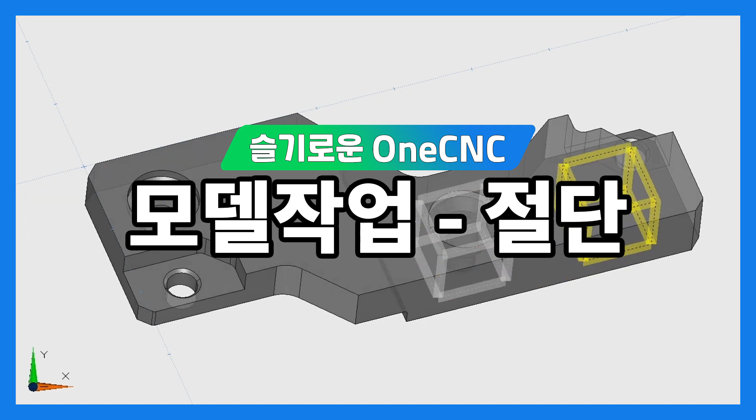In this tip of the day, I'd like to demonstrate a very powerful CAD tool provided by OneCNC, called the Solid Cutter. Solid Cutter provides the ability for you to use a solid model as a cutting tool. You can cut features into another solid model very easily.

Let me demonstrate. In this example, you can see we have a part represented by the gray solid model here, and then we also have another solid model that I'm going to use as the cutter.

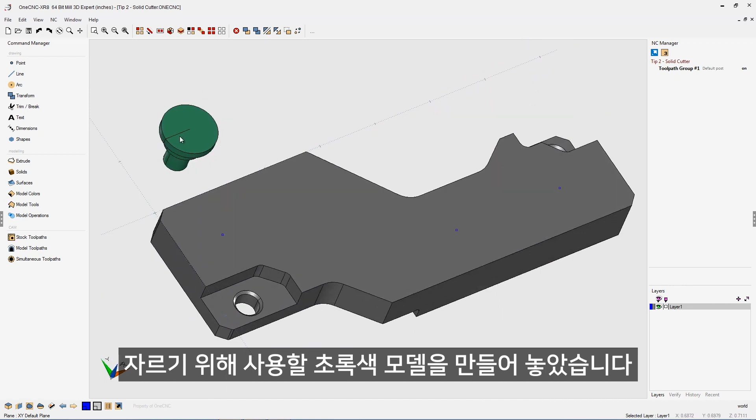Now the first thing you need to do is position the cutter where you want it. So I'm going to hit the letter S on the keyboard, left-hand mouse click the cutter, and go into our move tool. I'm going to grab the cutter right by the center line there, left click, digitize that location point, left click, and then right-hand mouse click.

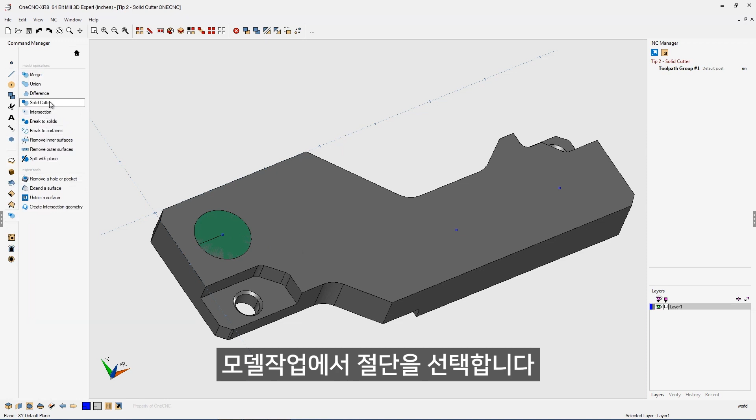Now with both solid models deselected, I'm going to head back over to the command manager. Let's go into our model operations and select solid cutter. Now down here, OneCNC prompts us, select the object you want modified. So I'll hover over the part and left-hand mouse click. Now it says select the cutter, so I'll hover over the solid model I want to use as the cutter, and left-hand mouse click. Now even though it doesn't look like anything's happened, OneCNC has actually cut a shape into the gray solid.

Let's move our solid cutter. I'm going to select the solid, hit the letter S on the keyboard, left click, go to move, grab the cutter by the center line, and position it at the second location point. That looks very good. You can see that OneCNC has used this green solid model as a cutter, and it's quickly created a very nice shape into our part.

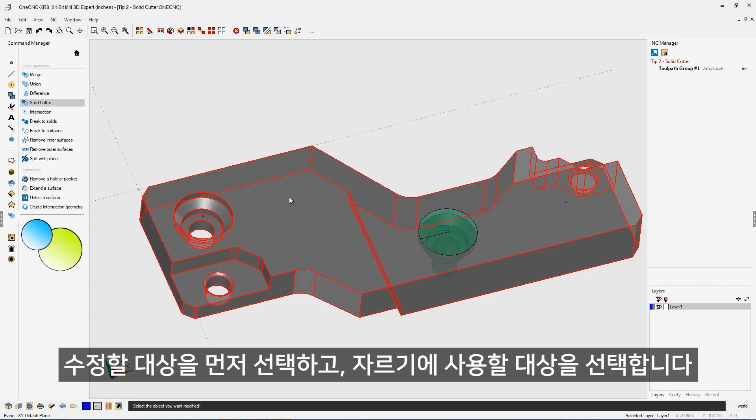Let's do the same thing again. Head back over to the command manager, go back into our model operations, solid cutter. Again, we select the solid we want modified first, and then we left click the cutter. Very, very easy. All right, let's do it one more time.

I'm going to left click the cutter, go into move, grab the cutter by the center line, and place it at the location. That looks great. Make sure that both your solids are deselected. Come back over to the command manager, go into our model operations, solid cutter, then left click the solid model, then left click the solid cutter, and there we go.

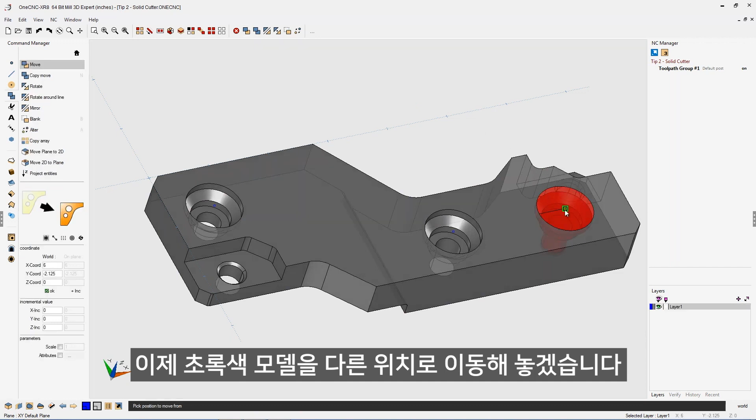Let's quickly move the solid cutter to a different location. I'm going to grab it by the center line, and just place it right about there. That looks good. Now another very powerful feature in regards to this is that you can save that solid model cutter in a separate folder along with other solid models that you'd like to use for cutters for future parts.

Very, very powerful CAD feature provided by OneCNC.